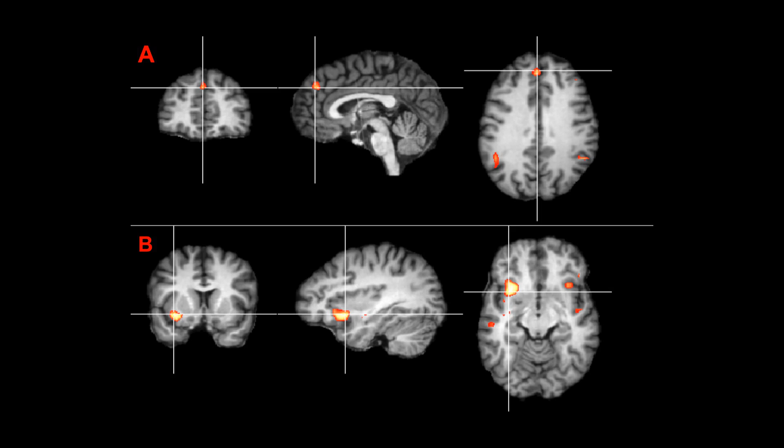But there are more than personal anecdotes at our disposal as designers. Aren't there relevant psychological studies out there that could inform the function of a workplace, of a living space? There are, and not just ideas from armchair psychology, but findings from the scientific study of human interaction with space.

The goal of the current project is to elevate a multi-use high-rise past something that is pleasing to the eye from the outside and something that is environmentally sound in the traditional sense, to the level where it actually functions with the occupant first in mind. Although the amount of applicable psychological research is limited, some relevant studies have informed the design of the downtown high-rise seen here on Block 162 in Denver.

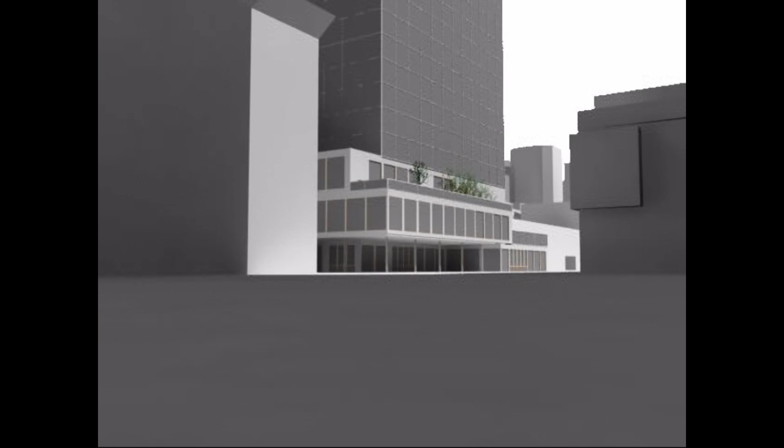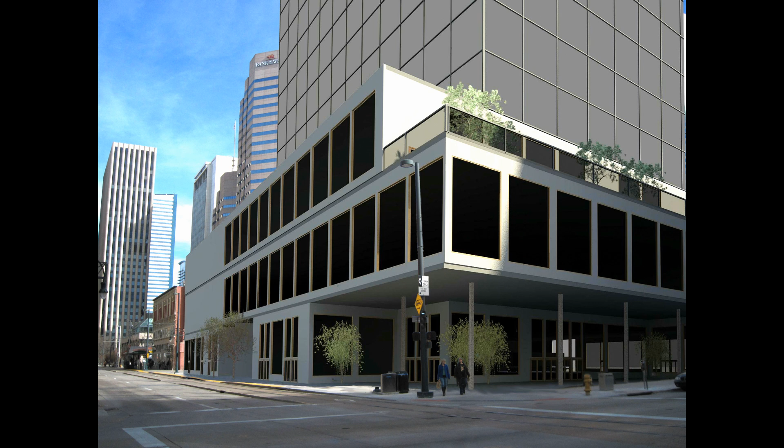Upon entrance to the building, one might notice several roof garden areas. But these are not designed in order to gain LEED points or because they seem pleasing. Rather, these are a fundamental design characteristic that is a designed and functional aesthetic. Green spaces have been shown to have healing effects on patients in the hospital, but more recently, researchers have discovered that they may also improve the productivity of workers on attention-demanding tasks, not to mention improving the mood of occupants and increasing the desirability of homes.

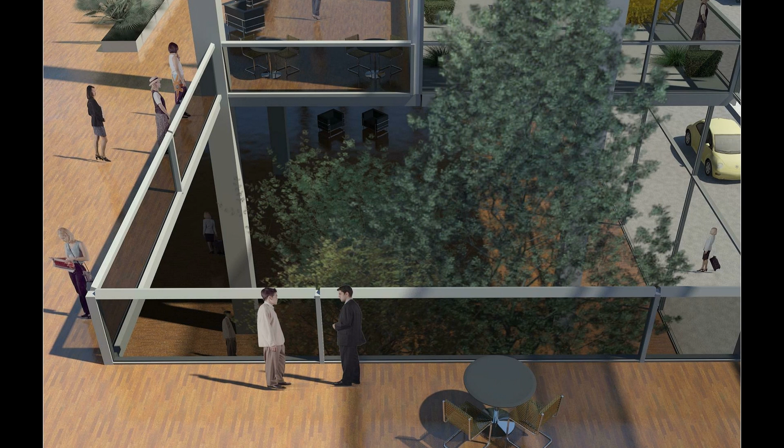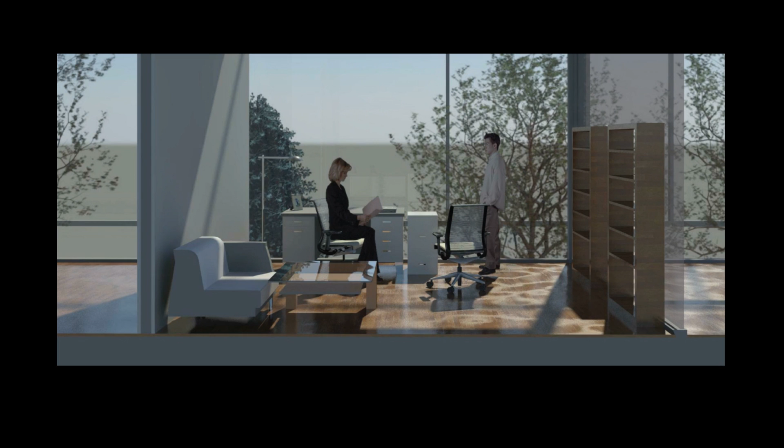Therefore, green spaces have been included throughout the building on the southern exposed sides, from the upper lobby level seen here, to multi-level gardens throughout the rest of the building. Importantly, larger and higher storied green areas have been provided for the office levels. Smaller but still aesthetically pleasing two-story garden areas are provided throughout living spaces, both hotel and condominium. Here we see what a view out from an upper-level office might look like. The plantings here would also be seen on lower levels.

Of course, there is a benefit to these green spaces beyond psychology. The smaller gardens, particularly on the hotel level, can be closed in colder seasons for the warming effect, and opened in the hotter seasons for cooling. A roof garden planted with sedum also helps with cooling.

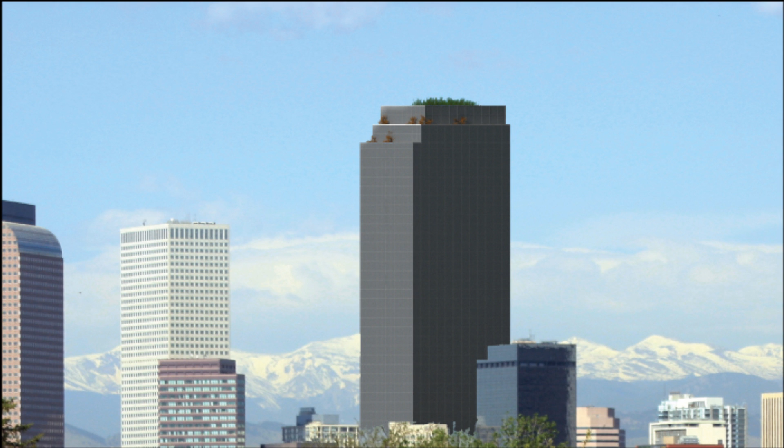The hotel portion is provided at the lowest level, though still high enough to avoid noise pollution, for the simple reason that the occupants are there for the least amount of time compared with the workers and the full-time residents. The office is in the middle to provide better views, and the residences constitute the top portion of the high-rise to increase its value. For the residences, the garden areas are made even more attractive to buyers on these sides of the building as they span 2 floors of living space for each garden home, with a balcony to each mini atrium on the second floor.

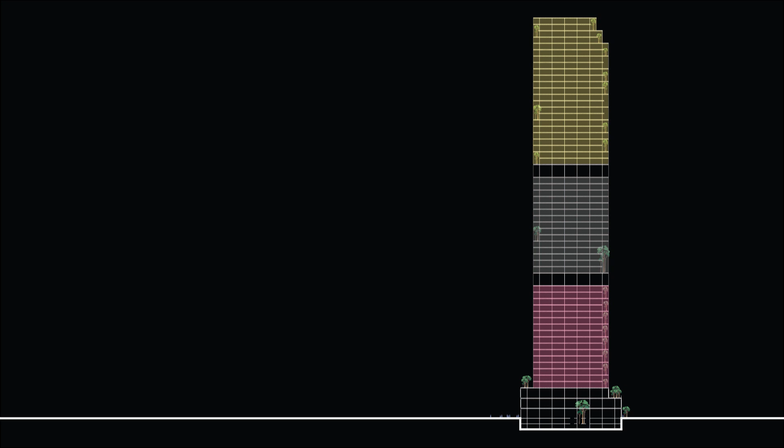Additionally, recent studies have shown the effects of transparency in a building's facade to the occupant. People's mood gets worse and sleepiness levels increase as transparency becomes compromised. This is relevant to glazing, as photovoltaics on the skin are a reality. Therefore, on the current project, such technology could only be used as a gradient or a portion of the skin such that the viewable area is not impeded to any degree.

As in other state-of-the-art high-rises, other environmental and technical considerations have been made. Moso bamboo will be used for flooring, cork or recycled rubber for underlayment, an underfloor air system will be implemented, concrete will be used that replaces some cement with blast furnace slag, rainwater and gray water will be recycled, and there is a proposed geothermal system connected with Denver's relatively high water table.

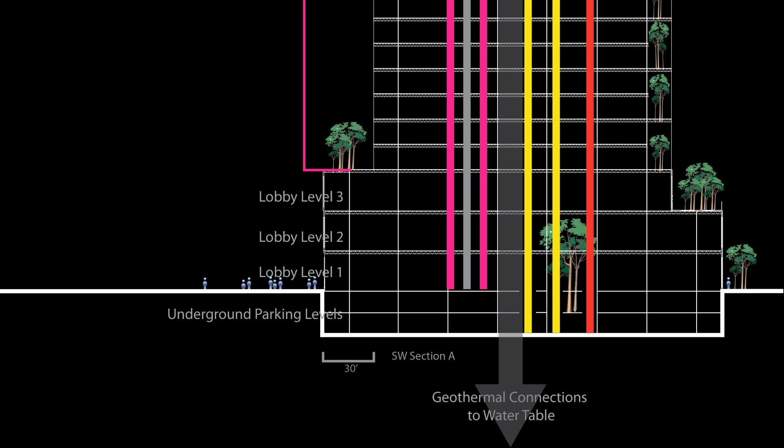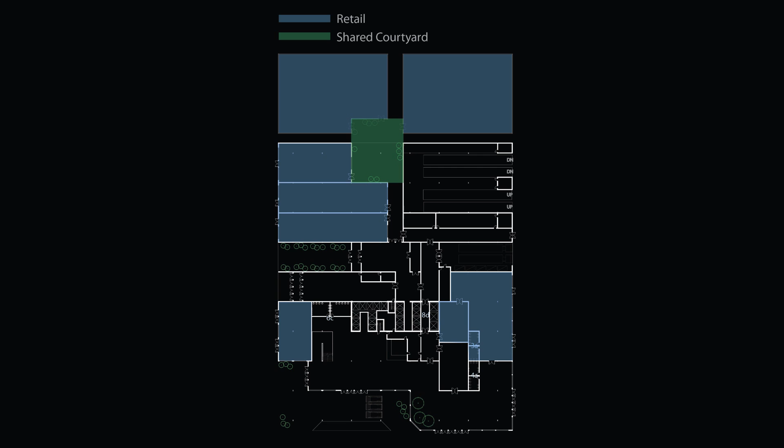Of course, the general functionality of the service and served space must be addressed. Let's take a quick look at the design of the lower levels and core to see how the multiple uses of the building function. Seen here in blue are the available retail units to draw in customers and the public. The existing buildings toward the north are partially gutted to create a larger shared courtyard that connects with 16th and California, and to a lesser degree Welton.

The service entry, delivery, and loading dock are located on Welton and connect to a working corridor that runs up and down the entire building and cuts across all hotel and retail functions. In yellow, we see the residence entries and circulation. In gray, the office entry and circulation. And in pink, the hotel-related entrances, spaces, and circulation. Therefore, areas are distinct, yet close spatially, and always near service access and the core.

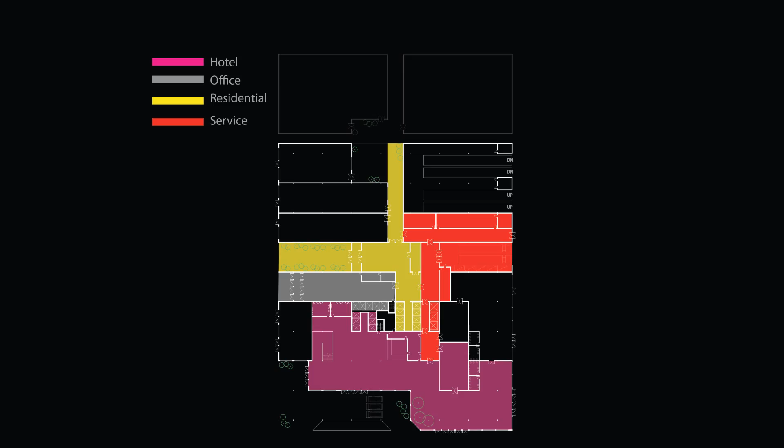But the real story is not from the outside looking in. The occupant lives with the building. It is a part of their everyday life, and the more it can be made to help their mood, to make them more productive, or in other words to work and live with them, the more successful it will be.